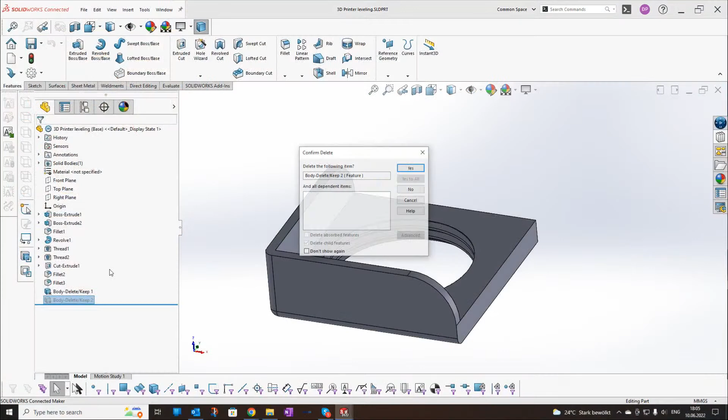So this is something that is designed for printing. I will now show the two parts. So it's a part for leveling my printer, because my printer is actually not so expensive. It's pretty cheap and it prints really great, but it was not sitting properly, and a lot of printers are on the desk and have this issue. So I just printed a leveling for my printer so it can be perfectly leveled and I can have the best prints.

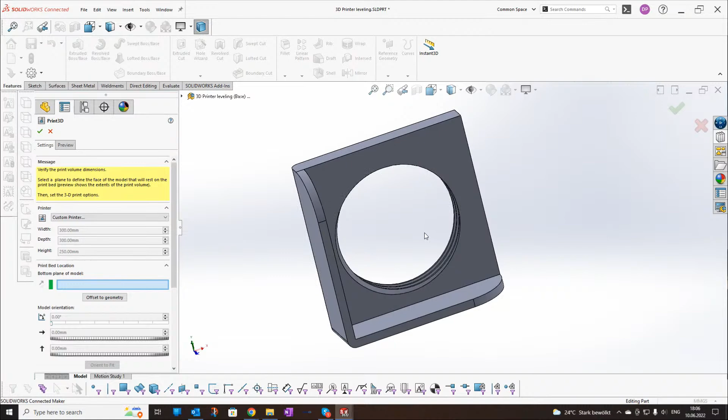What is the part here? Many people actually don't know you can print threads. You just have to go with threads that are more than 1 millimeter pitch and you will have no problems printing that. And what is the difference when you design for 3D print versus a normal design? Usually if this part is injection molded, they will make the thread afterwards, and it doesn't matter how you place it and where the thread will be. But when you're going to print this part, it's very important where exactly it will be sitting.

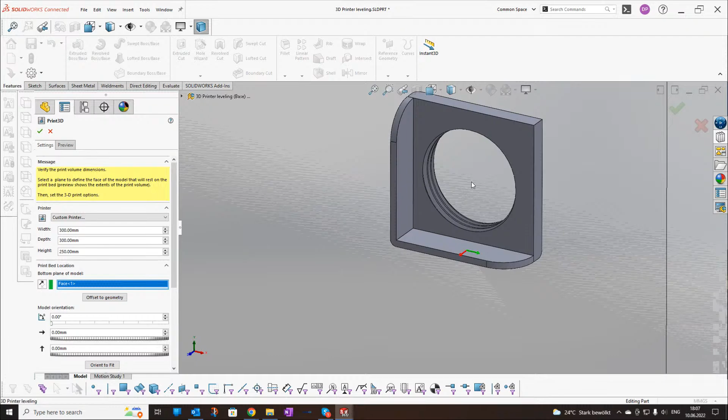There is this nice feature of SOLIDWORKS, Print 3D, and you can make a small evaluation of your model by choosing the bottom plane, showing the different layers. So if you choose this as a bottom plane, this will be wrong. On this thickness, it may work and you may be able to print it. But if you're printing a thin wall with a hole inside, there is a big chance your layers split the moment you put inside this hole what should be there. So you should always consider that the hole should be made by the printer moving the head around, and not having the layers like this because they can split. This is one of the very important things.

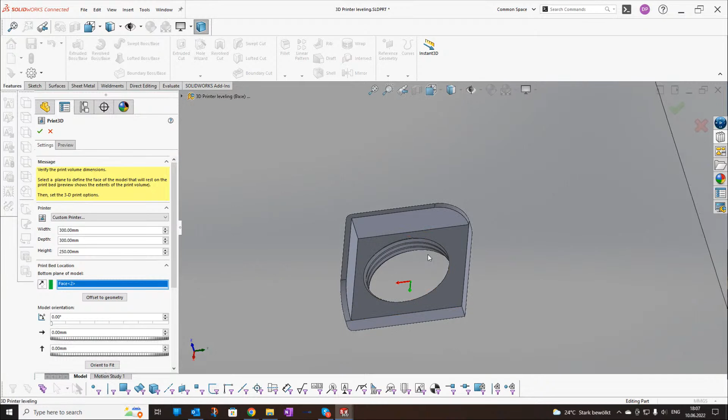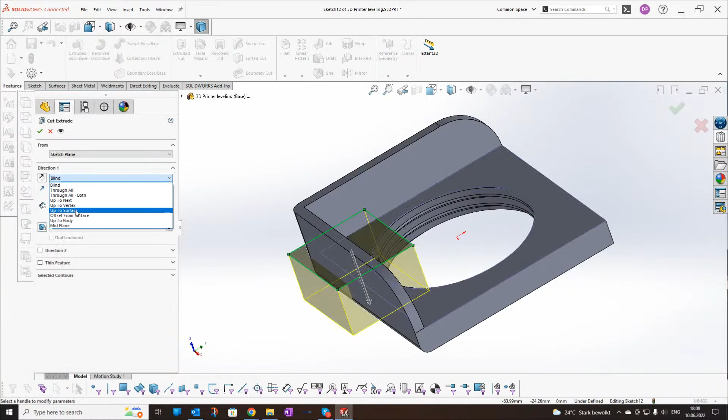The other thing is when you're designing tiny walls, it's good to have some additional support here if the walls are connected at some angle. Otherwise, there is a great chance the wall will just break, especially if the layer is going like this. So I will close the 3D print now. Okay. If my wall was not like this, but like this, no matter that it's actually a pretty thick wall, this is a recipe for disaster. It's a 2 mm wall, and it will break here. Absolutely 100%. It can be after a day, it can be after a month, but it will break because the layers will just split. They're not holding as tight as when the plastic is completely melted and then left to cool down.

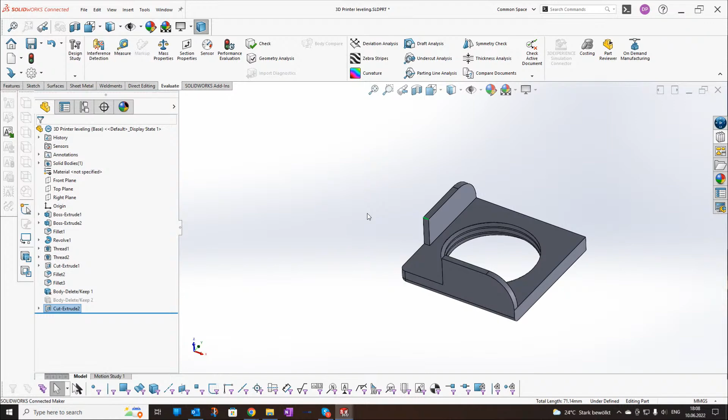So what would you do there? Would you put a fillet in, or maybe a rib or a gusset of some kind? You can put a fillet, but actually the thing that works better is a chamfer. You just put a chamfer on the inner side. Okay, so this is interesting.

A lot of times we think about chamfers as a way of removing material, but here you're using it almost like a weld bead, like a fillet weld. Yeah, and this is adding material. Yeah, and this is actually adding strength. You can also put a chamfer here, but the critical area is the one here.

So here it will be more or less solid, but on the inner part it's stopping with one layer exactly here and starting with the next, which is pretty thin here. When you make the area a bit wider on the bottom, it holds better.

Okay. And as I'm checking in on the chat here, it looks like we have a question. Can I give you a question, Danute, from the chat? Yeah, sure. So Mohammed is asking, we're talking about fillets here and chamfers. What's the biggest fillet that can be printed with a 0.4 millimeter nozzle? Is there kind of a rule of thumb? Is there some math you can do on that?

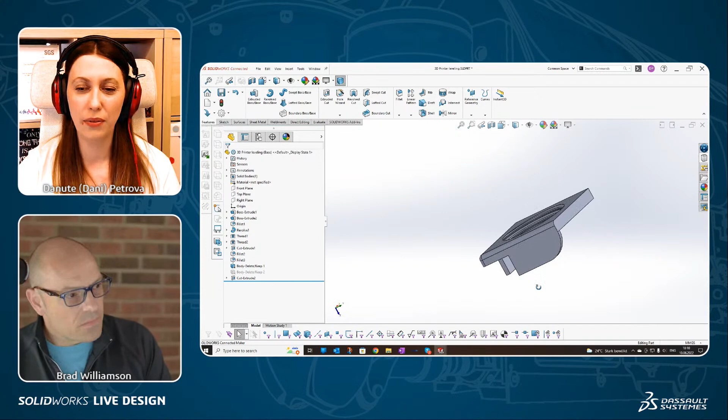The biggest fillet that you can print. So actually you usually have a problem with the smallest fillet. The biggest, right. It would be the other way around, wouldn't it? Yeah. The biggest depends more or less on the machine that you have. Yeah. And the way you print. So if it's oriented like this. Or maybe, I'm not sure, maybe Mohammed can follow up with that, but maybe he's talking about before support is needed. This is absolutely individual to the machine.

There are actually a lot of free models that you can use to test the capabilities of your machine. You can see the overhang that you can have. You can see the bridges your machine can do, because it's individual to each machine, the material and the operator, what the machine can actually do. And what I highly recommend is to find one such file. They're available free. Download it, run it on your machine, and see what you can do with it.

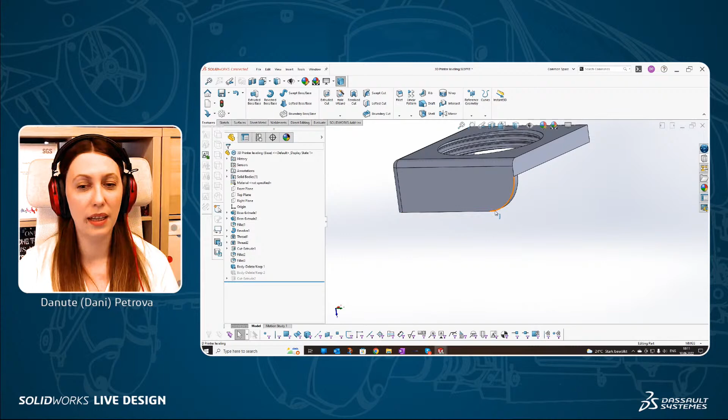Oh, looks like we have a follow-up here. The question is the biggest fillet that can be printed from the bed, so on the bottom plate of the print. Yeah, exactly. He's doing it like this, but it's actually the same. The lower part is always a bit more crushed, but it also depends on whether you have good cooling while you're printing. So it doesn't matter. The angle and geometry is the same. The size doesn't matter.

Got some good comments coming in on the chat. The tugboat model test. Yep, Matthew, I've printed that one too on my printer. So I'm sure a lot of people want to know what printer you're using today. It sounds like you have experience with a lot.

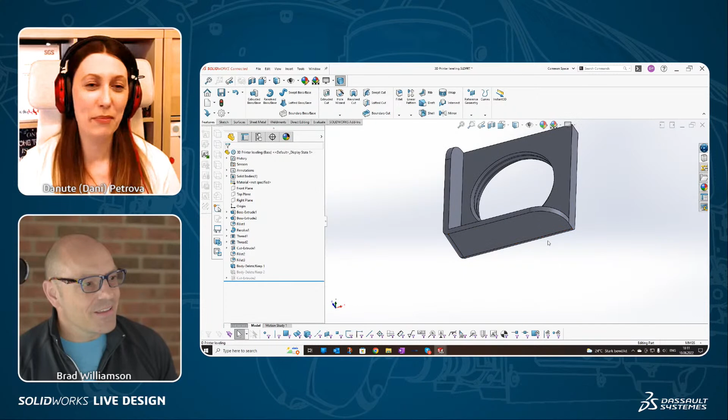Yeah, well, I bet there are a lot of people that have more experience than me, but at the moment I'm actually using the Elegoo Neptune 2S. It's a pretty new printer. It doesn't have all the cool features that some of the newest printers have, but it has everything that I need. So it's a great machine that can print with really good quality. And actually, it can print an overhang of 85 degrees, which is amazing.

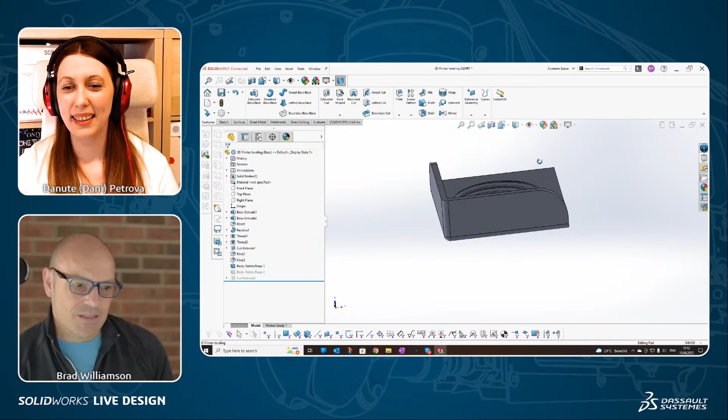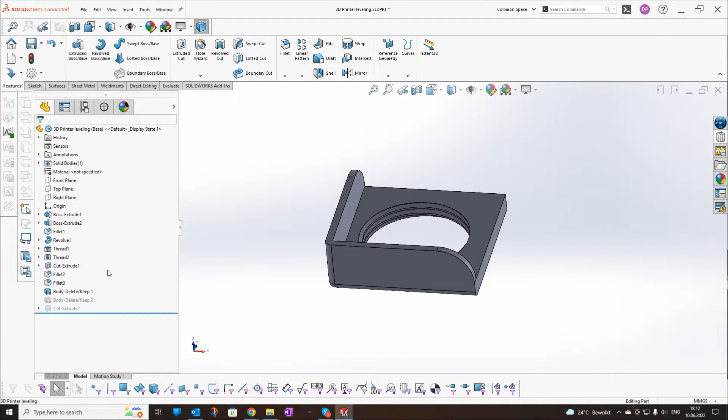So, okay, now we covered where to put the holes. We covered being careful with layers. And actually, do you know that you can print different types of clips? Like different types of clips. Okay. Yeah. Show me what you mean by that. I will just make one right away. So I will go back here. I will play mostly with this model, I think.

So let's assume you want to make a clip for a battery holder. Oh, okay. So we can press fit into it. No, not press fit. So even with PLA material, which is pretty brittle, you can print a clip that works, into which you can add something. Okay. What I actually do to get the best thickness, because the thickness of the clip also depends on the diameter in this case.

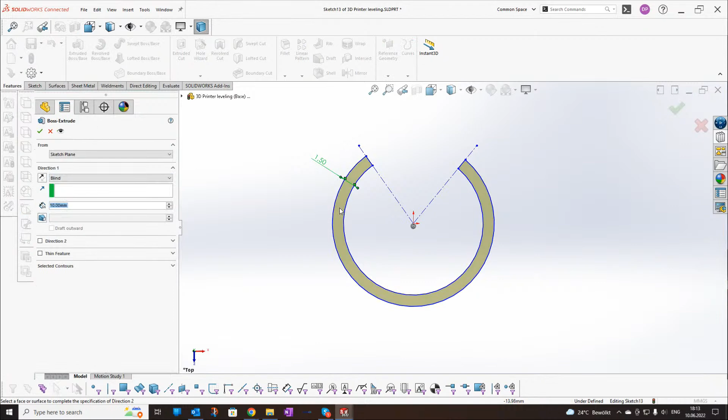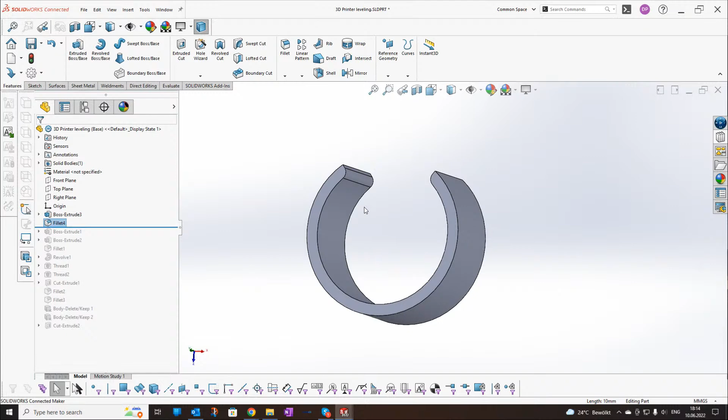Let's imagine we want to push something through here, like a battery. The trick I do in this case is I just print a few different clips with a difference of 0.1 in thickness, and then you can see which is the best one for hold and flexibility. You can even do this with PLA. Recently I needed to work with this material and make a clip. I didn't believe it would work out, but it worked, and actually pretty well.

So you're doing some trial and error by making a few different models with different thicknesses and printing them all at the same time, is that right? Yeah, that's it.

There's also another thing which I didn't mention but is kind of important. Not always are you printing on your own machine. If you're like me, a freelancer, sometimes you have a customer with his own machine, and as I said, it's very individual for every machine. When I build models for my machine, I know my machine's tolerances. But when building a model for somebody else, you should find out their tolerances, and it gets a bit tricky. What I'm doing is, let's say for this clip, I will make another part.

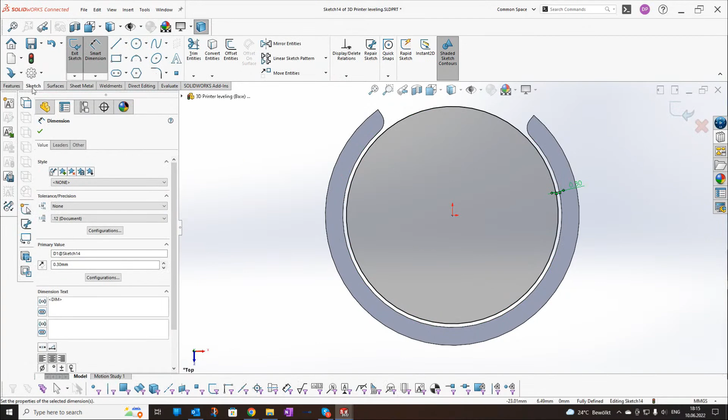I make two parts close to what we have, and usually here I will put a number. So I make one with the distance 0.2, then one with 0.3, and so on. I send him like 4 different models and ask him to print that and tell me which one is actually fitting best. When he tells me, for example, 3, I know that 0.3 is the gap that's working best on his printer.

So you're doing a little self-calibration there. This is interesting because I'll do something like that too, running a little test print just to get my sizes right, maybe not even printing the full model, maybe just a small piece of it. But I hadn't thought to print all my iterations or a range of iterations all at once. That's a clever tip, I'm going to steal that.

So I've got a couple more questions here. It looks like Noah is asking - you're our resident expert here - are there any special print settings for printing thin threads? You said you need to make sure you're bigger than 1 millimeter pitch, but are there other tips for printing thin threads?

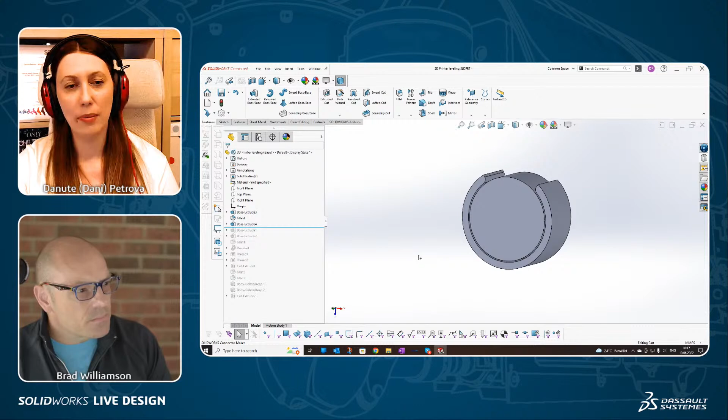You actually can print less than 1 millimeter pitch too, but I would not recommend printing anything below half a millimeter. If you're going below that, I'd recommend just printing a hole and cutting the threads, since usually this is a small hole. When printing less than 1 millimeter, you should stick to the lowest possible layer height - the smaller the thread you want, the smaller your layer height should be.

That follows up with a question about what parameters affect these tolerances - layer height, and what else should we be acquainted with? Actually the layer height isn't affecting that much. It affects the outer shape and your model if it's not straight. If your model is straight, it doesn't matter what your layer height is. For tolerances too, it will have a minimal effect.

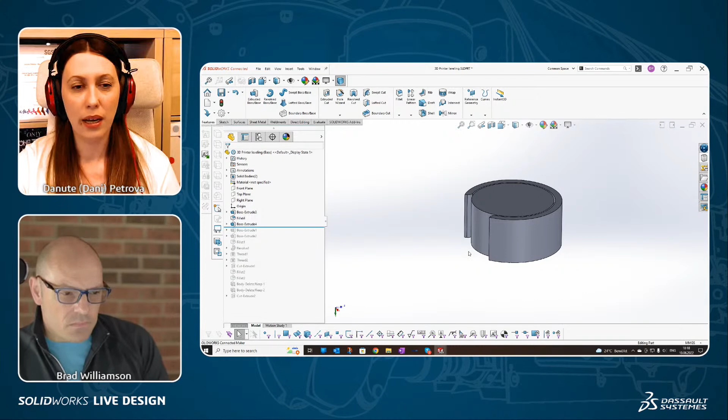But the temperature of the material itself is what's affecting most, and the setting really depends on that. Sometimes when you want something more precise, you should find the lowest temperature you can print at without having layer splitting, and then it will be more precise. The bottom layer is usually a bit wider than everything else because of the hotbed - if you don't have a hotbed, it's also wider, because you smash the filament a bit in the bottom layer to stick. But what really affects the tolerances is the material, the temperature, and the printer's ability to control the nozzle temperature well.

So you showed us the Print 3D screen a little while ago. One of the questions I'm seeing is, can SOLIDWORKS do the slicing for us? Can we visualize the layers from within that screen, or do we need to go to some external software?

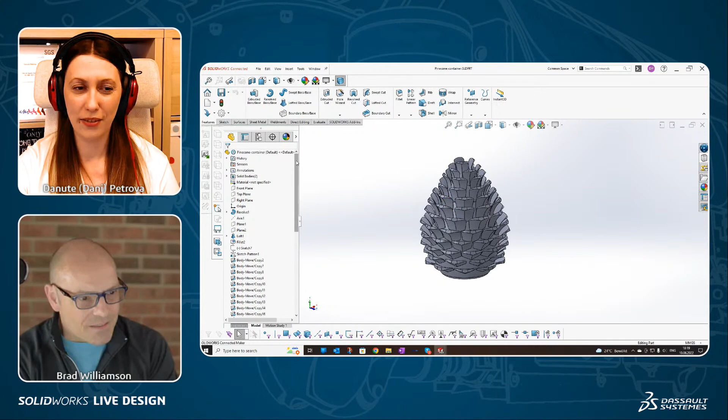So you can visualize the layers I was about to show, but I want to show it on a bit more complex model. This model can actually be printed on my printer without any support, depending on the qualities of your printer. I can check that in SOLIDWORKS. I said my printer has an overhang of 85 degrees.

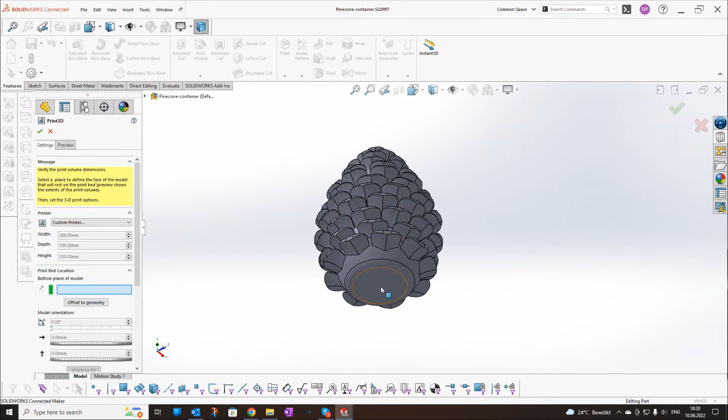And we go to Print 3D. Here you can choose some printers. Mine is not available, so I just pick a custom printer. Choose the bottom plane, in this case it will be that. So this would be the orientation of the bed - this is where the bed is sitting. If you want to scale it, here you can scale it too.

And if your printer is here, I think you can literally print from SOLIDWORKS, but I never had such a printer, so I cannot check. Here you have printer properties, job quality, support, and draft. For checking purposes, you go to the Preview tab.

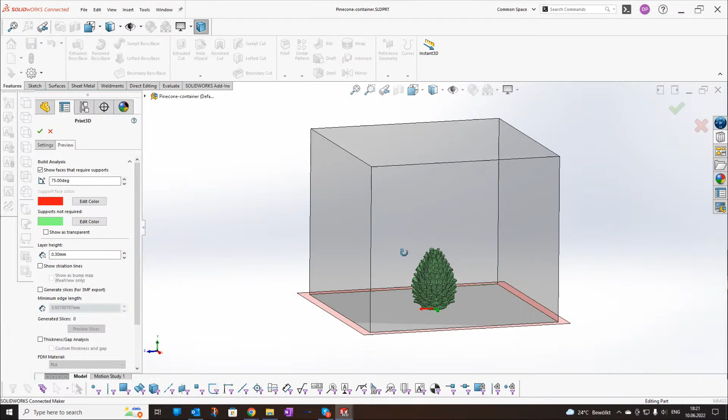And you can hit here, Show Faces that require support. And here's where you put your support angle, which is just what you would know based on your printer. I know my printer is printing without any problem - a perfect face at 75 degrees and a bit rough at 85 degrees. So I will put 75 because I want this to be beautiful. And when I look at the model, I see that just this here requires more than that.

Tiny little bit of support is all that's needed right there, huh? Yeah, but then when I go to 80, I see it will print support - no support. If I have a worse printer and go to 65, for example, you see I need a lot of support here. Yeah, and so the support then means there's going to be some cleanup, some post-processing - it's not going to be as smooth.

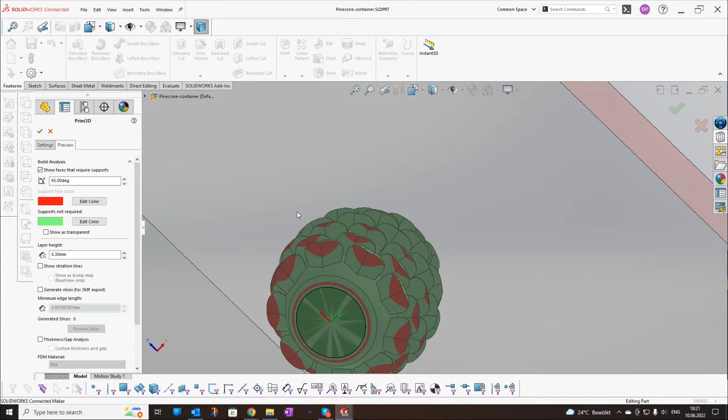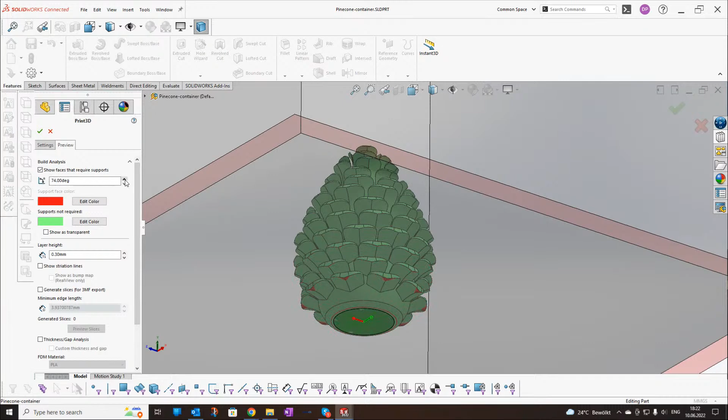But actually with this tool it's really great to check your design, because you can modify it before you print and before you see that you actually need that support and it's not looking nice. With a test print you can know exactly how far you can go with the angle. That's a really great tool here. So the support angle is really printer dependent, it sounds like. Yes. Mohammed, I think that answers the question about your negative angle - it's going to be dependent upon your printer.

And here when we go a bit lower, we have this Show Striation Lines. You will see how the layers will actually look. So these are the actual layers based on your layer height of, I see, 0.3 millimeters. I'll leave it at 0.3, so this would be a rough print. And wow, when you go lower they will change, they will adapt. Yeah, that's amazing, it's like a print preview.

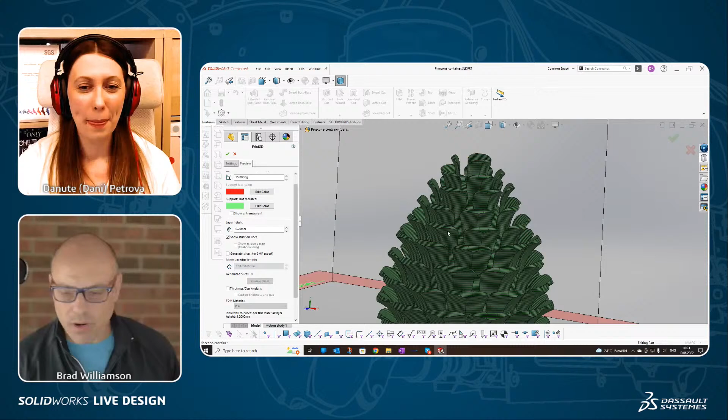Now if you had a supported printer, could you actually generate the G-code, or do you still just output the STL from here? I never had a supported printer, but when they presented this feature a few years ago in SOLIDWORKS, I think they said it would be able to directly print from SOLIDWORKS. But I never tested that.

That was my understanding too, that it can print directly, but I'm not sure if we can actually get the G-code file itself to transport to another printer. No, you cannot have the G-code. This is just for printers that can be connected to the computer through USB, and you can print directly through USB with drivers. It's not a slicer software.

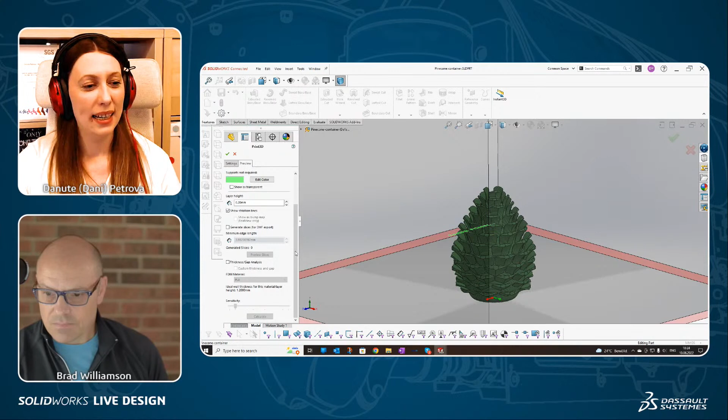So what else we have here also in the tools is thickness and gap analysis - another cool feature. You can choose the material and hit that, and it will calculate based on your layer height and material what is the optimal gap and thickness. You can change the sensitivity and calculate. That's why I picked this model, because it's not perfect, and it will show you where the gap is too small and where the material is too thin for that print.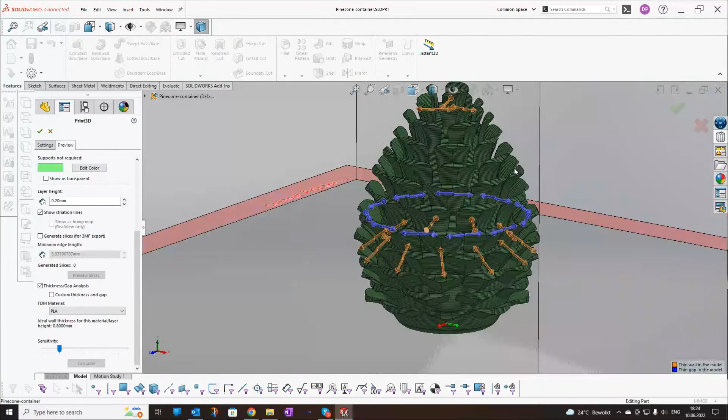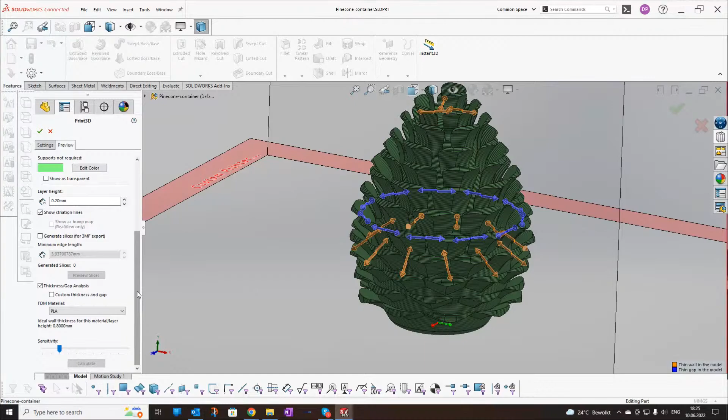But again, even with this information, especially for this model, which is a container for pine nuts, for me it doesn't matter. This will not affect the end product when I print it. In some cases it could be really important information that the gap is too small, because there's a chance to close it. There's a chance when you print it, this gap just won't exist when it's too small. So there won't be a gap if it's too small.

So now you can ask your question, Brad. Oh, I was just going to ask, this is a container for pine nuts. Yeah, so it's a pine cone container. So it's got a lid, or it screws off? Is it threaded? How does it work?

This one is not threaded, it will come out from the 3D print, so I will just hide the lid. No, I have the other part. The lid has a small channel to fit inside without sliding sideways. Okay, and you can print both at the same time?

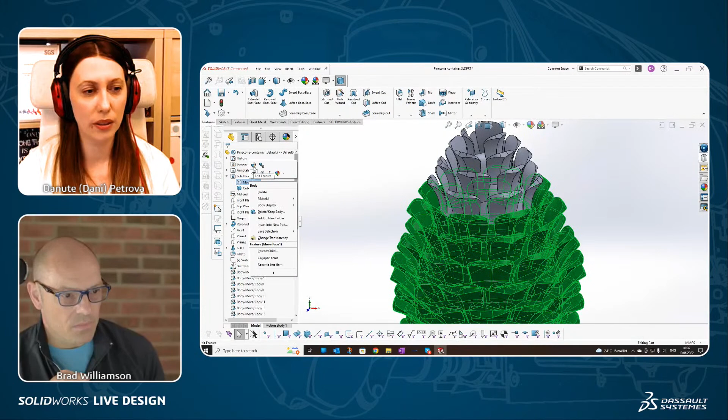One on top of another? No, they will just be glued together. But you can put them one next to the other. So you'll lay them side by side on the bed? Yes, usually this is what I do.

So this is the lower part of the container, and I will make a section. Here it is, there we go. So this is how it's looking.

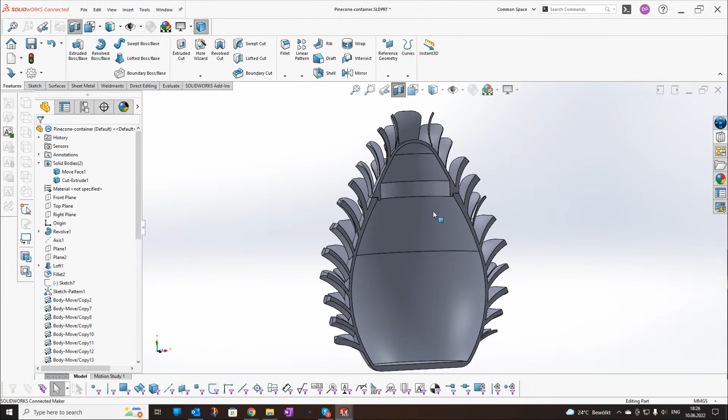So tell me about your process then for getting this to the printer. Two separate STL files then, one for top and bottom? Yeah, the process is pretty simple. SOLIDWORKS has a lot of tools for modification, which are great. You just make delete body, save as STL.

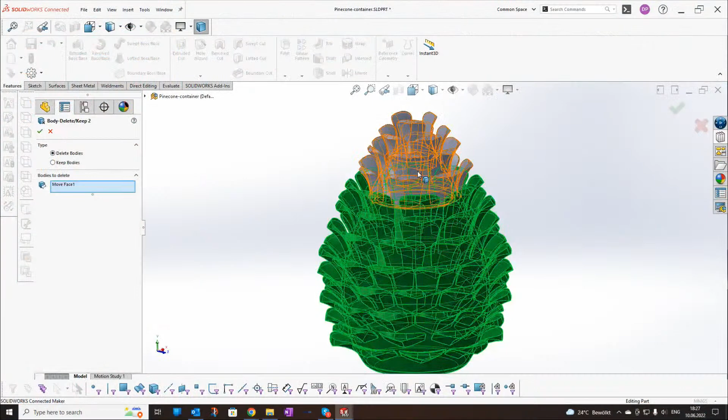Then I edit - I don't even put a second feature because I'm lazy in this case, it's a private project - and just change them, then save the other. Or I suppose you could do a move body and move the lid down to the base and output them both in one file, couldn't you? Yes, I can do that, but the slicer I was using before was able to separate two files when they're together in one.

At the moment they changed something and this is not possible anymore. And if I don't have a lot of time, or I don't want to start a long print, I can print just the top, or I can print just the bottom. Or for example, the top failed and I want to print it again - there is no point having the two files in one, it's better to print them separately.

If you want to print them together, you can always set up the printer to print them together for this job. But it's good to have a separate file so you have the freedom to choose what you want to print. Yeah, that's a good tip. I guess that's a consideration I hadn't thought of before, but something to think about if you're printing multi-bodies, whether to use one STL file or make it more modular with two files. Trade-offs either way, I guess.

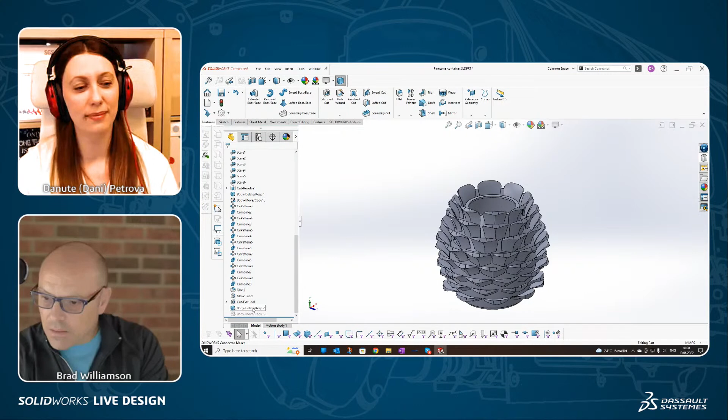Yeah, Ashish, hope I've got your name right there. Any metal-related material to print our machinery parts? Not sure I understand that question all the way - we're talking about FDM, which is primarily plastic-type materials, correct? Yeah, but actually I understand the question and I can answer that. So you can be my guest.

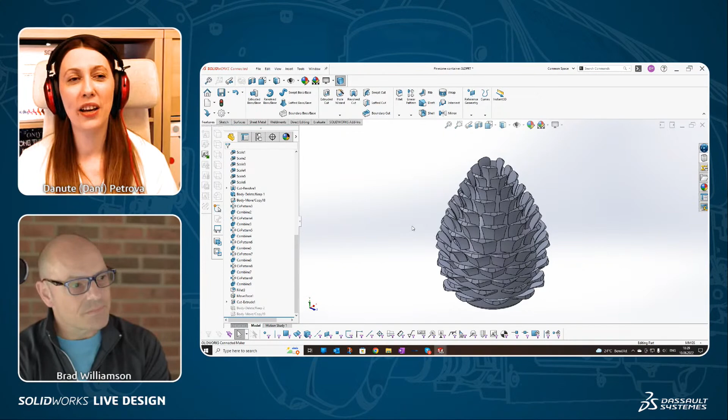There are now existing FDM printers which have reinforced plastic with glass fiber. It's still plastic, but the manufacturers of these printers claim that the material is as strong as metal, so you can use it to make prototypes for metal parts and test them. I've had samples from such a printer, which is reinforced, and yeah, that's unbelievable, the strong material. I never tested it on a real machine to see the readings, but I believe they're really, really close to a metal one. These are special printers - they have two filaments, one is the special plastic, and the other is the glass fiber, which is reinforcing it.

Yeah, those are definitely a pretty popular platform these days. I think we have a number of resellers that are carrying that technology too. Yeah, so threads and tolerances really seem to be on everybody's mind here in the chat. Can I give you a couple more questions, Danute? Yeah, sure - so what are the max and min tolerances of a 3D printer?

So if you have a really, really precise printer, the tolerance for the gap could be 0.1 millimeter. There are such FDM printers in the low budget range that can print that good, especially if you print slow, if you have calibrated your machine well and you have picked the right temperature. For the max one, I don't think I have seen something with more than 0.5 millimeter. So it should be somewhere around there, 0.1 to 0.5 millimeter.

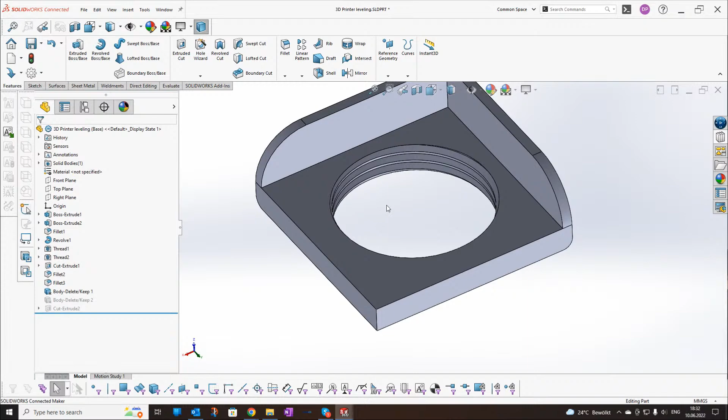Okay, good. So I hear one millimeter sounds like a pretty common number for a lot of your testing and a lot of your baselines. I have another number, but it's hard to print and it's not for everybody.

Okay, very good. So you showed the thread feature, by the way, and I just want to make sure our SOLIDWORKS users out there are aware that you're using the thread feature built into SOLIDWORKS Desktop. 2017, folks? Tell me in the chat. I want to say it was around SOLIDWORKS 2017 that this feature came about. And some of you may not know this is here, and you're still creating threads the old-fashioned way of creating a curve and then doing a sweep.

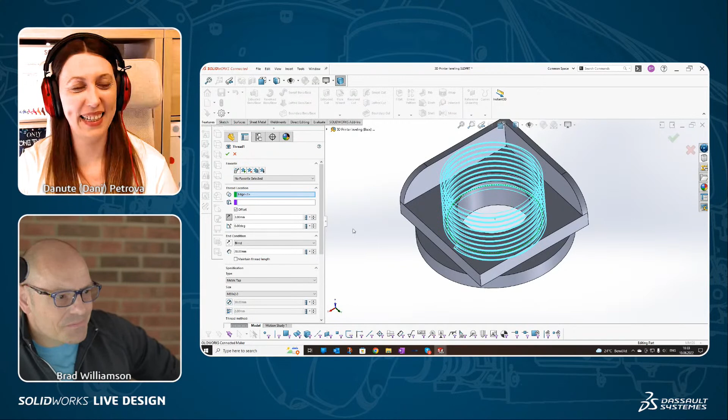So that feature was a life changer. That was a life changer. I mean, the moment they released it, I loved SOLIDWORKS. Not that I don't love them normally, but this was the one that I needed the most because I'm also doing a lot of renders, and you have to model the thread for the renders.

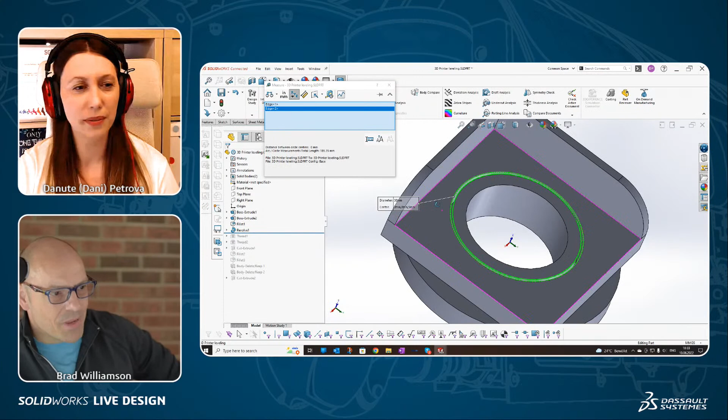Yeah. By the way, I can check the gap. I said it's 1 millimeter, but let's check it. There we go. Measure tool. We have great tools here. No, 0.5 millimeter is the gap. I lied. Oh, 1 millimeter in the diameter. Yep, 1 millimeter diameter.

Exactly. So when you go here on the thread feature, on the hole wizard, on the arrow, you have this thread. There is also the stud wizard, this is pretty new. You hit that, and it warns you that these are nominal values and you should not use it in your design. But I do use them in my design, and they're working great. So you have to pick a circular edge or sketch. In this case, I have this edge.

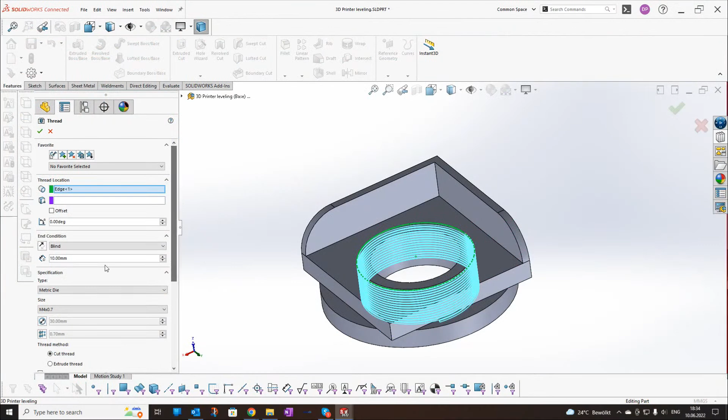When you pick it, based on the diameter it will, oh no, actually it will take the last one I was using. Remembers your last size, good. Yeah, because this is a really big hole, it's definitely not M4, it's diameter 30. So you pick from here the size that you want if it's a standard size, but if it's not a standard size and you just have some hole in which you want 1 millimeter pitch, you just search for something with that. So M10 has 1 millimeter pitch, and I will just pick M10.

Then the other thing which is good to make is an offset. By default, I don't know why, it is going inside the thread. You have to reverse it to the opposite direction. And when you're using one, you have to choose at least 2 as its offset. So you're trying to run the thread out into the air a little bit? Is that right? Yeah, otherwise here you will have the edge stop of the thread, and it will not go through all, because it's starting with the edge itself. Okay, that's a good tip.

Yeah, and in this case, I will be cutting the thread. So it's okay to make it like this, but when you're extruding the thread, then you have to go here and give trim with start and end face. Okay, so that's what takes care of the offset then. Yeah, that's what's removing the extra material which will be after your edges, if you're extruding. Very slick.

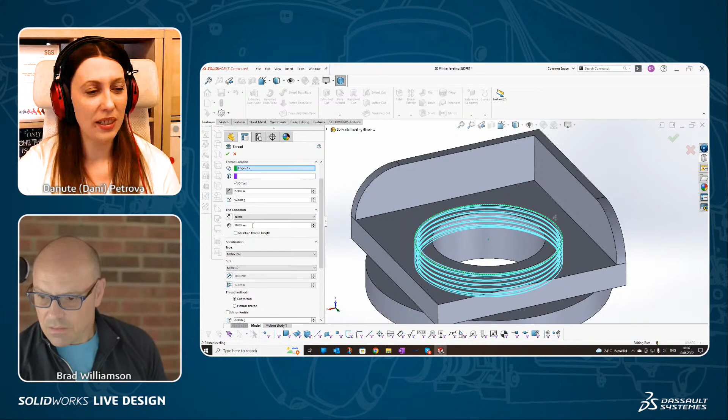And if you need a certain length and you have used offset, you should hit here, maintain the thread length. Otherwise, when you offset to 2, it will continue just 8. This is when it's natural. So that's measured from the offset. So you've got to make sure that if you're using a blind value that you run it out past. Okay, that makes sense. Yeah, so they have thought about everything in this operator.

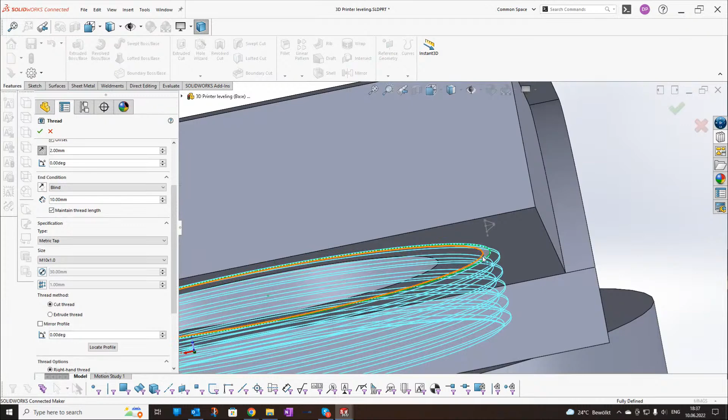So here you have, is it tap, is it die? And if you cut or extrude. In this case, I'm not sure if I'm in the correct orientation. No, I'm not. So if you look here on the sketch, the sketch is going in that direction. So it's wrong. This means you have to switch to tap. Yep, it's a tap this time, and as you can see, it rotates. Always look at the preview. So you always have to check that. And more or less, that's it.

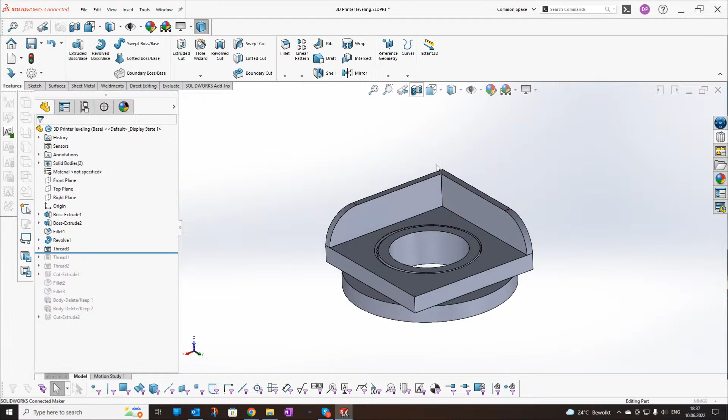You can locate your profile, you can rotate it by some degree. There are different options. It's a nice operator to play around with. Yeah, and I've done a little bit of printing some functional threads with this, and I've really found it to be really reliable and easy to use. It looks like you're making a lot of use of it too. Yeah, I am. It's really comfortable. A lot of people are avoiding printing threads. They think it's hard to print, but actually it's not so hard. Even if you're thinking that the thread has a big overhang, actually it's not. And now I'm going to show that.

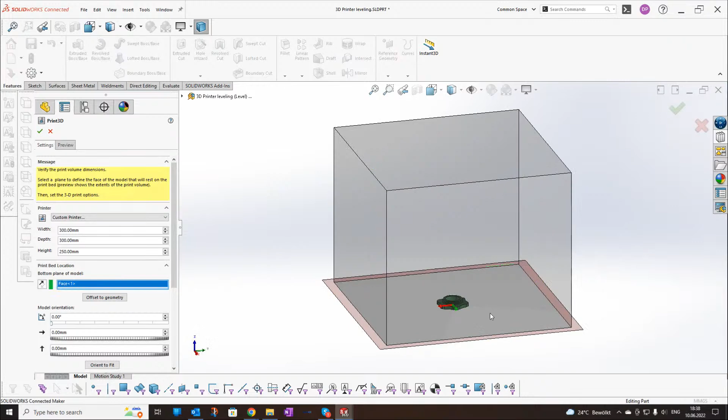Okay, here I have two bodies. I was not lazy here. We're going to print 3D. Choose it here. I will just rotate it like this, and we go to the preview. So if your printer is able to print an overhang of 60 degrees, you can print threads with no support. That's awesome. And actually, this is a value that every printer produced in the last 2 years should be able to do. For sure. Yeah.

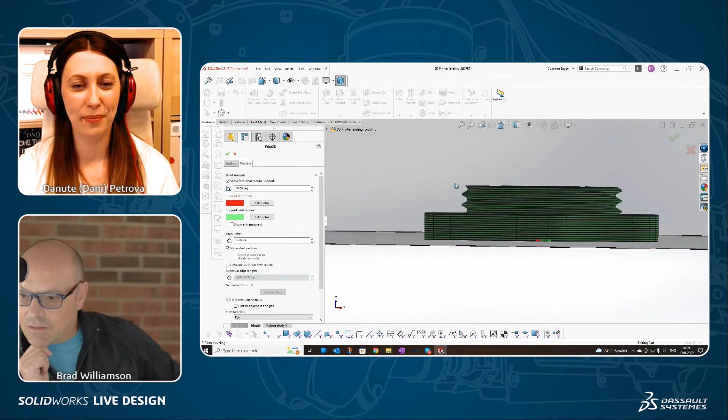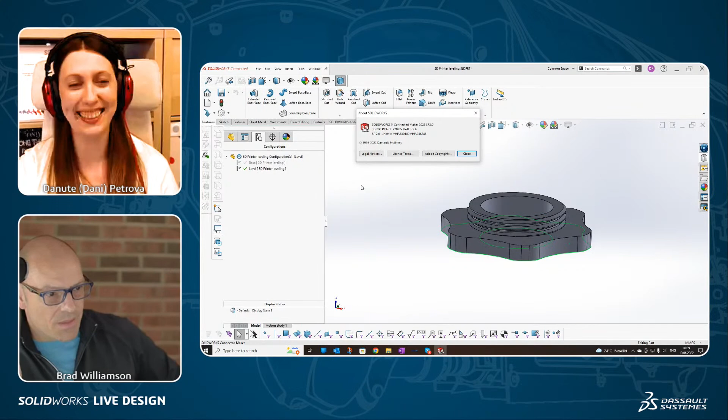So quick check-in on the version and instance of SOLIDWORKS that you're using here. So I'm using SOLIDWORKS for Makers. It's actually the latest one. So here it is. There was a hotfix today, so it's really the latest one. Yeah, you're definitely the latest. So 2022x is the nomenclature then for 3DEXPERIENCE SOLIDWORKS. So this is the maker version.

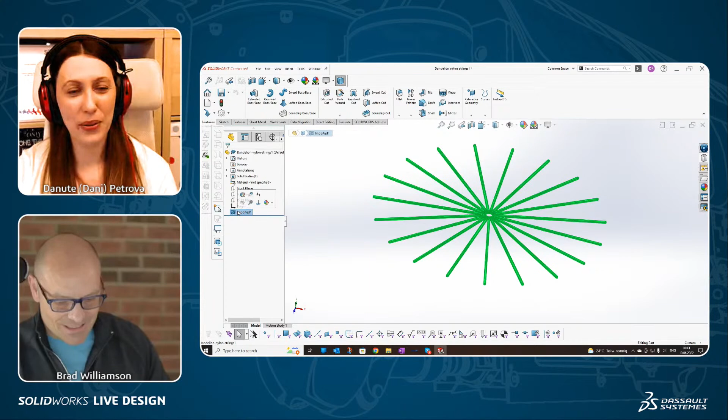I will open this STL file. Oh, okay. Now we're getting to the interesting part here. I was hoping you were going to get to this. Okay, so when you have the STL import, I just imported it. It imported as a body because these are the settings that I have done for myself. But probably most of the users have a standard setting to import a graphic object.

There are 3 different ways you can open an STL. So I will go to open again, but I will not open this time. Here, when you hit options, you will see what your settings are. Is it a solid body, surface body, or graphic body that you will import?

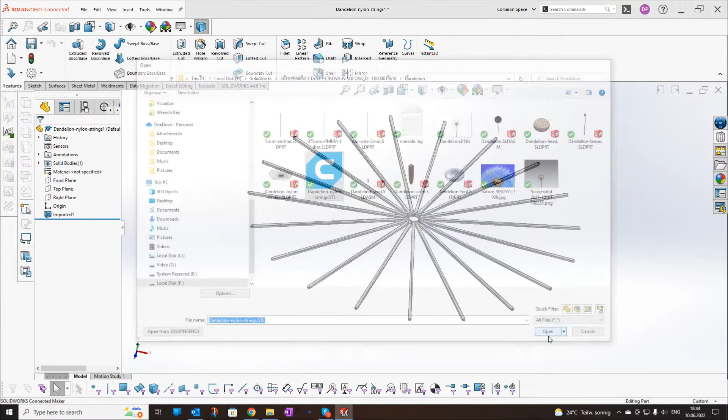The problem is with very complex shapes, you have to go to the graphic body, or you have to simplify the shape before that. If there are a lot of triangles, it will just get stuck. But by a lot, I'm talking hundreds of thousands of triangles. Everything below that should be importable. So here you can pick the different ones. And if you import a graphic body, you won't be able to work with it because it's a graphic body.

Yeah. But SOLIDWORKS has you covered also here. You go to Insert, Features, and you have here Convert to mesh. And then you have a solid body and a graphic body, but it's hidden. And with this now you can work. Okay, so what are some things you could do to this mesh body at this point?

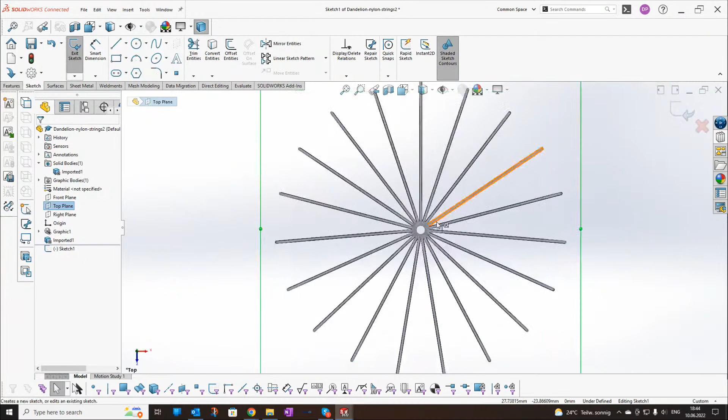So let's go to the top. Okay, so a little bit. Tangent. Well, not tangent. Let's just make some crazy shape here. Okay, so you're putting an extrude on top of the existing mesh body. Ah, okay, yeah, but I'm failing with some face. Failed to merge for some reason, but yeah, that's a great use case, right?

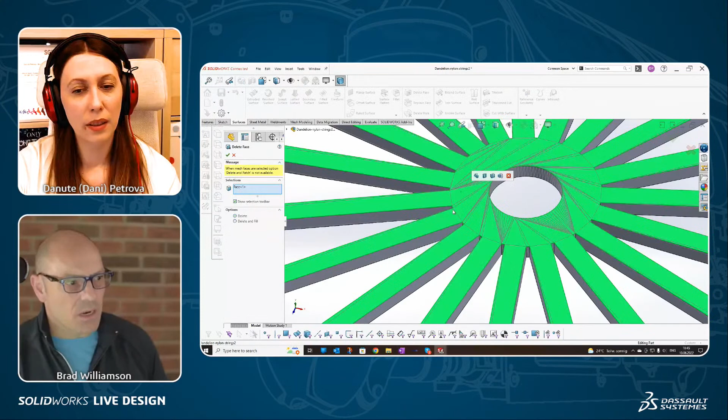You download a part from some online content. You need a hole to be bigger, or you need an extra mounting boss or something like that. You can do that through these. Yeah, you can delete the face, for example, convert it to surface. Then you can extend. There you go. So just a little manual repair.

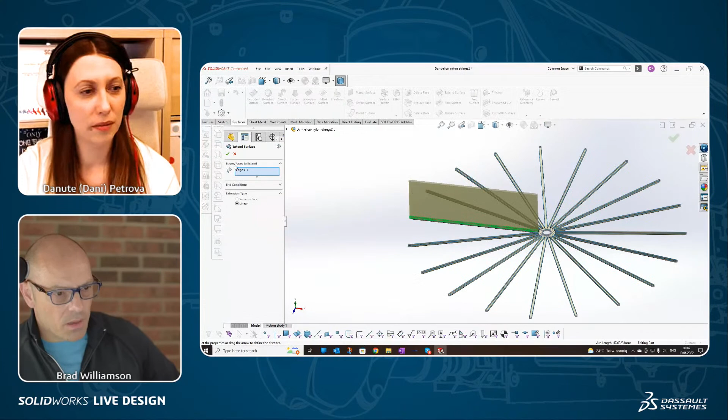Yeah, you can extend the surface, for example, and you can extend all of them, and then again put another on the top and make everything together. I mean, you have a functional model, and you can work with that. But with the graphic object, you cannot work. It took me really a few days until I realized what was the problem with the graphic bodies I was importing. A lot of people have asked me before why I cannot work with the graphic body.

The graphic body is not actually a body. It's a visualization of the model only. So just a bunch of triangles, right? It's just a preview, let's say it like this. It's like you're looking at a 3D picture. You can do nothing with it. You can just look at it. Maybe you can measure it or something like this. Yeah, you can measure. But you should accept the graphic body as a three-dimensional picture inside your model.

Yeah, great analogy. I mean, we would use that sometimes, like say in a really large assembly layout. Just for efficiency purposes, you could have graphics bodies in there because they're very, very lightweight. And really all you need to do is visualize maybe a space envelope or something like that. Yeah, that's a great way to use a graphic body. But the point is that a lot of users, when they import, they don't know they import a graphic body, or they cannot import something else.

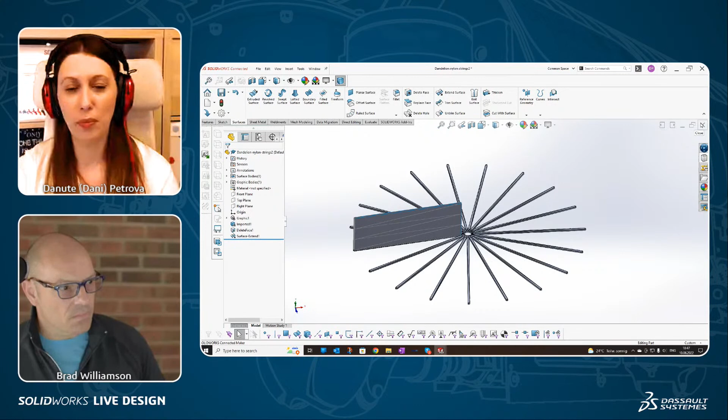As I said, with a lot of triangles, you cannot import surface or solid. I had this issue a long time ago when I was changing jewelry. So you can imagine how complex that shape is, and you just cannot import solid or surface. You import a graphic body, and then you can convert it and work with it. Okay, makes sense. Let's see.

Ben's got a question here. He's talking about functional parts. Do you find yourself adding tolerances to dimensions just by intuition, or do you use equations that you can come back and edit later, maybe to make a parametric type of part?

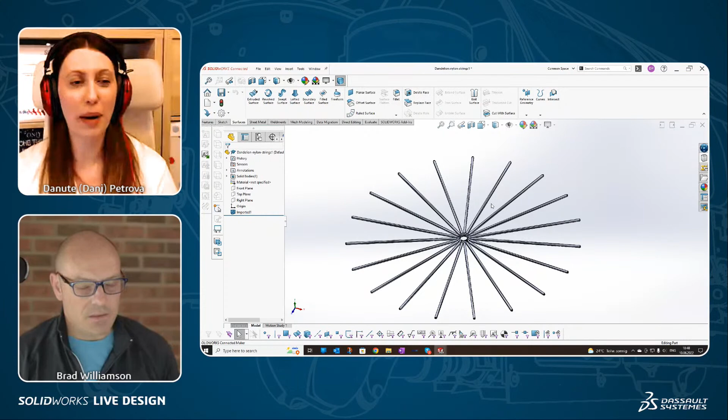So as I said, I know my machine, so it's not intuition. As a rule of thumb, on my size, and on any size actually, the inner holes are shrinking by approximately 0.2 millimeter on the side. And the outer walls are also shrinking. So these are the things that you have to consider.

So when your inner hole is getting smaller, the other part that should fit in this hole is also getting smaller, but the outer shrinking is less than the inner one. The outer is about half of it. Interesting. Yeah. So when your inner hole shrinks by 0.2 and your outer part shrinks by 0.1, it will just not fit inside.

Okay. So there's a little bit of GD&T that you're kind of doing intuitively there, isn't there? For max material and min material. It says intuitive. Yeah, well, 9 years printing.

Yeah. So if you do know that that's a ratio that you can rely on, you could parameterize a part where if you wanted, say, to make a family of sizes, you could make the OD shrink at a smaller rate than the ID. That would be a good use case for equations, it seems to me. Yeah, definitely. You can use these equations for that, and you can definitely predefine the materials.

As I said, everything is depending on the machine too. I mean, there are some standards, but it's depending on your machine. You can make a test print with holes. Most of the test prints have different sizes of holes. Yeah. And there is a reason they have different sizes. They don't have one. Great tip.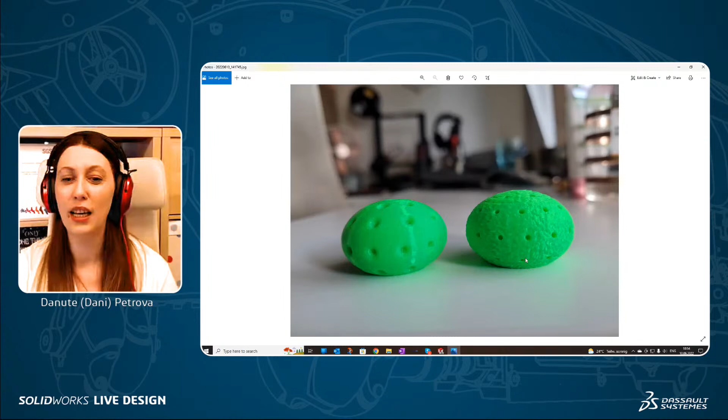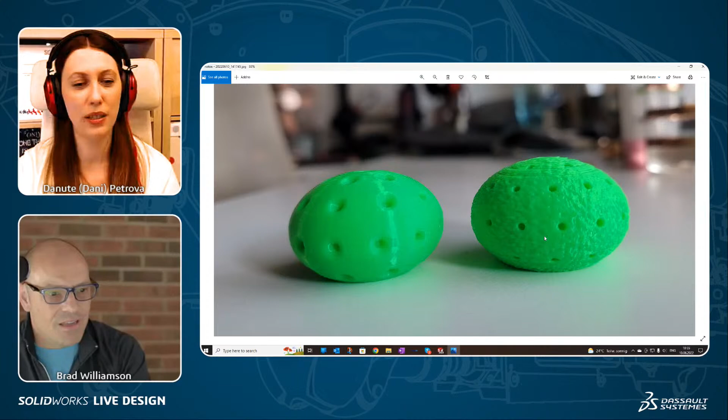And I wanted actually to show a picture, I think. Where was that picture? Okay, I forgot something. Yes, that's good. I went to the pictures. Do you know that actually you can use SolidWorks to make a surface rough like this? Okay, tell me more. I'm not sure what I'm seeing here. So this on the right side, as you can see, has some rough surface, and the left side is a normal print. And this rough surface is done with 3D texture.

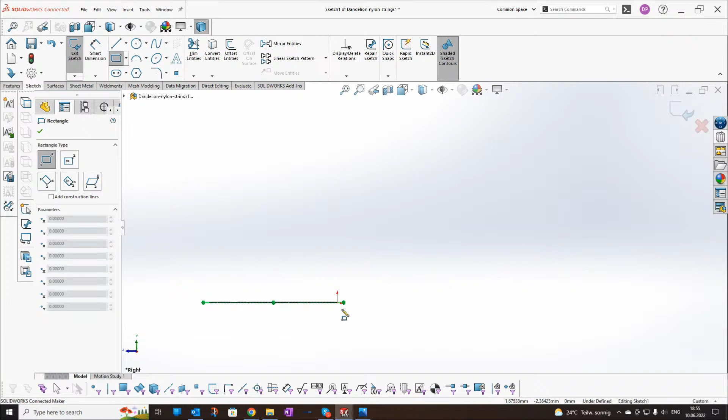Okay, now I'm interested. 3D texture. BZ, Zayas in the chat here, can tell us when that came into SolidWorks. Okay, so 3D texture is really cool. I found it out after using a professional SLA printer, which was supposed to have this option to make a texture of surfaces. But it turned out that this option costs a lot additionally, so we didn't have it in our software, and we were kind of disappointed. But then I found out about 3D texture.

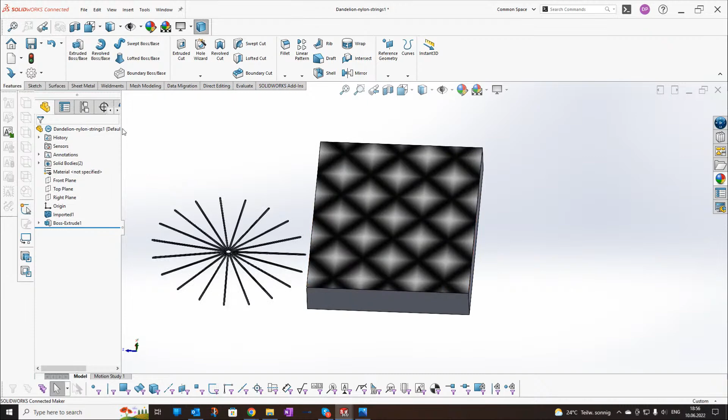3D textures, yep, right there in the task pane. So here are the 3D textures. You pick some. Everybody wants to do knurls, so that's right there, or maybe a dimple pattern or a diamond plate. Oh, look at all this. Yeah, there's stars there. But I actually wanted to show how you can do it with your own picture. Okay, well, I'll take the knurls. This is true ninja level, right? Matthew's chimed in with that. Okay, I will just make two. Oh, diamond plate, yeah. I will change the diamond plate.

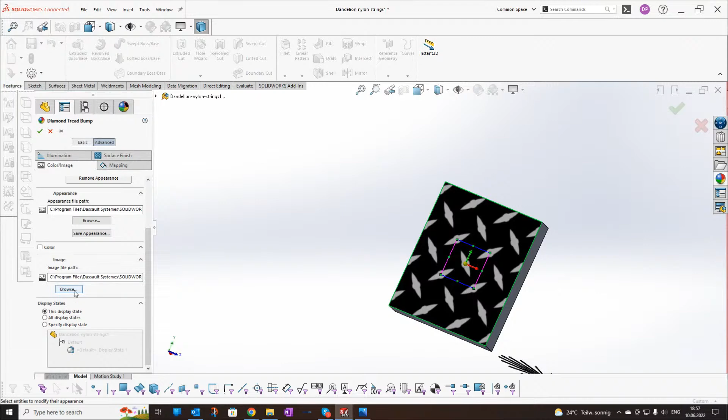Okay. So when you go to the diamond plate, go edit appearance. Go to advanced. And here you have image file path. You're just going to swap out the image. You go out of here, I go to my pictures. So you want a nice high contrast image, if I recall. I think I will steal something from Visualize. Yeah. Honeycomb. Look at all this. This is awesome. Yeah, so I will take that.

Okay, just leave it like this. So we have the knurls on one side, and this, you will see, is actually looking pretty cool.

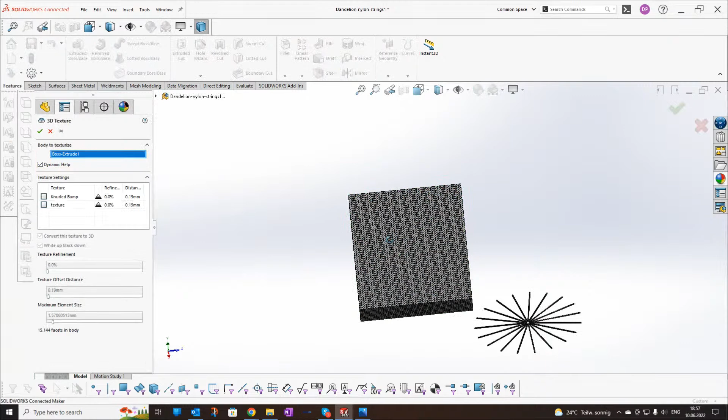Then we go to Insert Features and 3D Texture. Pick our model, and you can see here you can choose one by one if you want them with different settings, but I would choose just both of them.

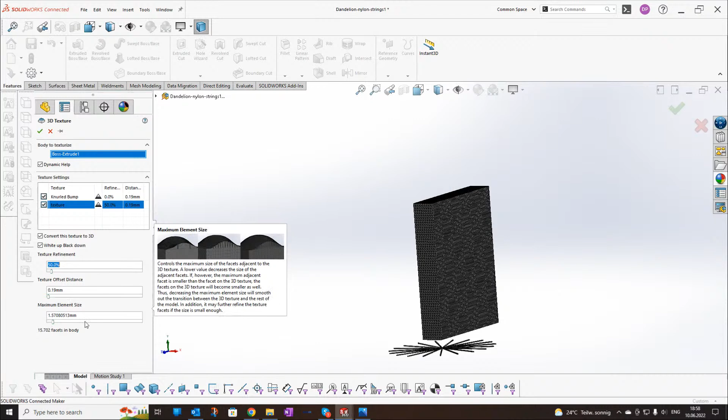So this is one side. Going a little smaller. Okay. Now I think this looks interesting. You can convert it also, white up black down, or the opposite.

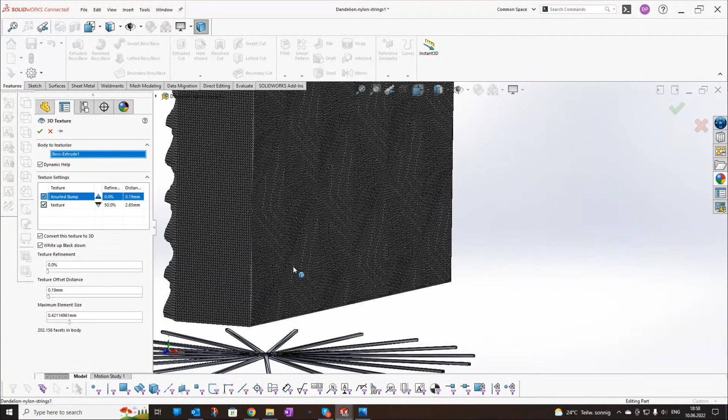And I have set up just this part. Now I go to the other, and we have the settings for the other side. Okay, oh my, look at that. And then just hit OK.

But you will end up with a graphic body. And we already know how to turn a graphic body into something printable, right? Right, we turn it into a mesh body.

2019, says Michael Steves, 2019 for the 3D texture. I can't believe this. It's been in my software for all these years and I haven't printed one. I'm going to do it. I'm going to do it this weekend.

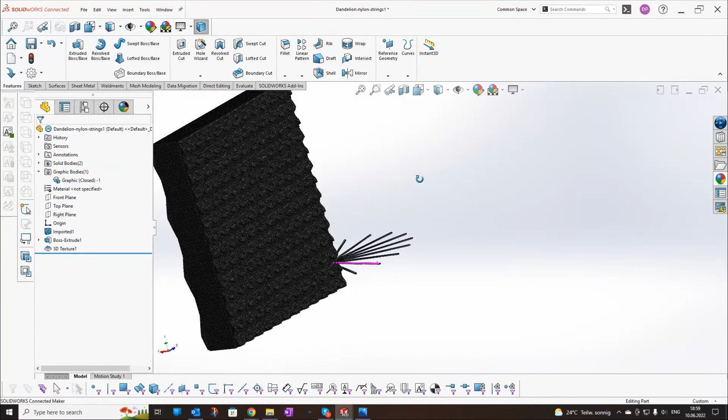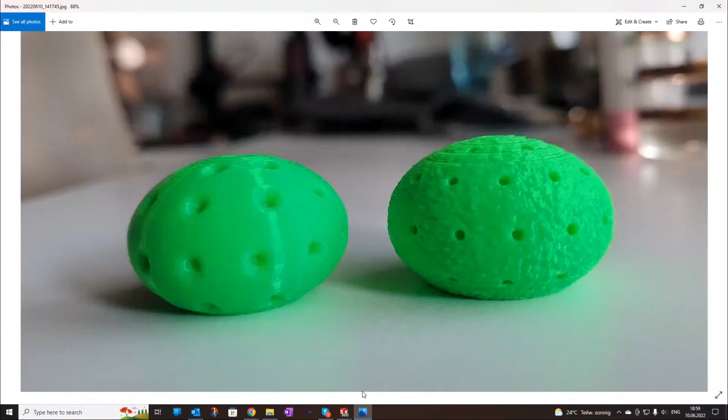The important thing when you're using 3D texture with something really rough on a side, it should be on the vertical side. So your print bed has to be here or here, or okay, here. Don't try to print it flat. Print it on the top, that's image number 2. Where's my... I really hate when I lose my slides.

No, that's the pine cone. See how bad it's looking on the top? Yeah, yeah. Okay, so, great tip, everybody, if you're going to print the 3D textures.

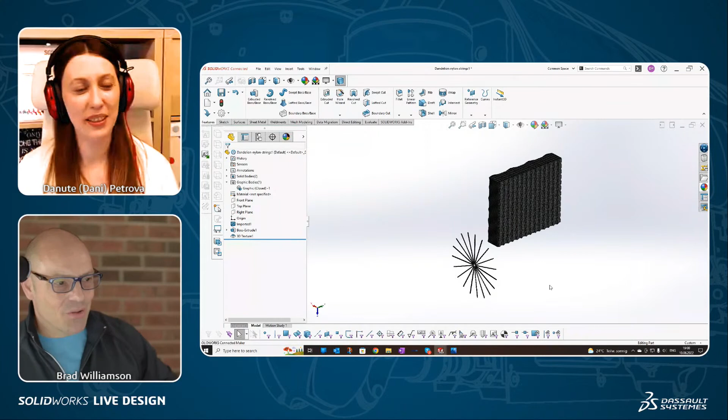I was about to show some prints. Yes, this little thingy I call the unprintable. Actually, many people cannot print that, but it's not so hard to print when you know what you do. When you want to print some tiny little pieces like the seeds here, you just have to print a lot at once.

Okay, these are not at enough distance one from another because it was a fast print. But if you need to print something really tiny to work, you have to place something else to be printed with it, so you have time for the layers to cool down. Otherwise, you will have just a messy, melted thing, not a shape.

That is such a great tip. I never even thought about that before, but just print something else with it.

Oh, and another trick when you're printing small things and you would like to preserve the temperature, while I'm still here, I will just make a wall around this one. You can always just make a wall around your model.

Okay, so some sacrificial geometry. Just yeah, you print a wall around your model, so not bidirectional, please. Just a thin feature extrude or an offset sketch, yeah, thin one with the height of your model.

Everybody knows how to do that, for sure. I will just stop it here. So you're just really giving the printer something to do while the main design model cools.

Yes, and in this case, this is actually to protect the heat in. I mean, if you don't have enclosure on your printer and you have some sensitive design, just print a wall around it. I mean, you can do that.

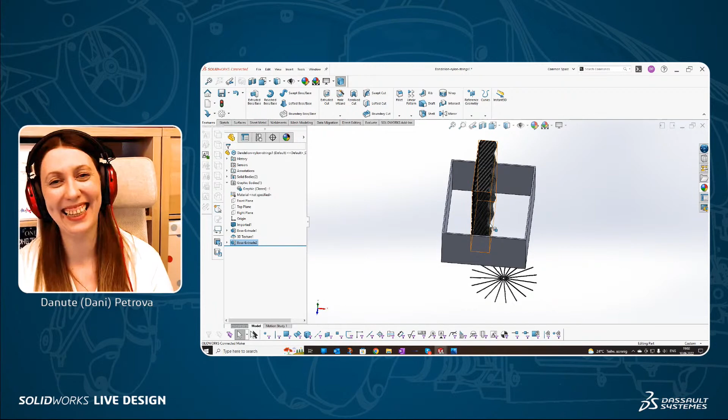Wow, wow, look at all the wows in the chat. Sean O'Neill, wow. Snaptrip, wow. Noah, super cool. Yeah, these are really some valuable tips. This is awesome.

Show us the dandelion once again. So very easy to grow - my yard has a bazillion of them and I can't stop them from growing, but really difficult to print. And this is kind of like your signature print, isn't it?

Yeah, I think you can tell that. But actually in GrabCAD, I didn't give a link for that - you can download the files for the print and print it yourself. There's also a video explaining how to do that. That's really awesome, I'll bet we'll see a lot of downloads for that file.

The fact that you've taken the time to get to know your printer, that's one of the big takeaways - really get to know your equipment so you can maximize the capabilities you have, then take the time with lots of prints, doing trial and error. Coming up with great tips like giving the printer something to do with other geometry, or building a temperature enclosure around your model - some really awesome things you can do. I love how you've taken advantage of great features in the software, like threads, print to 3D, and 3D textures. It sounds like you're really getting the most out of your expertise and your equipment.